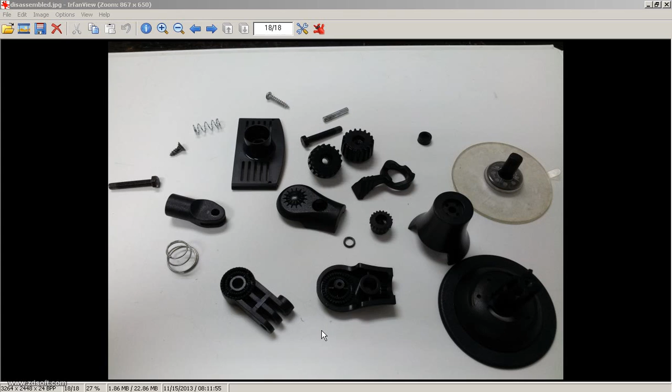Alhamdulillah, for this video session I would like to continue our video tutorials on our glass suction cup mount holder. For this video session, what I'm going to show you is how I made this component, which is the middle slot gear connector. This middle slot will be connected to this middle gear connector here, so that it has some attachment to this slot.

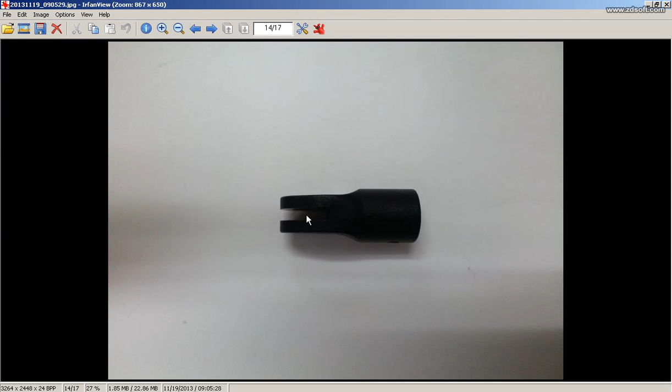So if you look directly on this image, this middle slot has a slot here, so it will be attached to the middle gear connector, two slots here. So we have two slots here. This middle slot will be fit into this middle gear connector, two slots here.

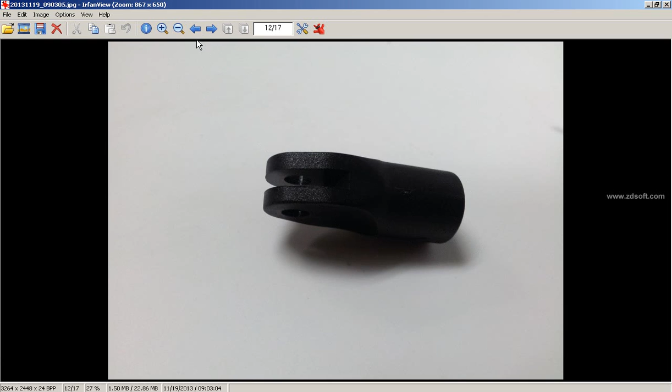So basically, I already know the dimension for this middle slot. Okay, so this is a closer view. The diameter is known, and the total length of this whole thing is known. So let me show you another view. This is a front view, this one is a top view.

So we have a slot, and if we look closely, we have a kind of curvature, a straight line here, and a curve here. So as long as we know the dimension, we can make a cutout from here. We have a line and a curve here.

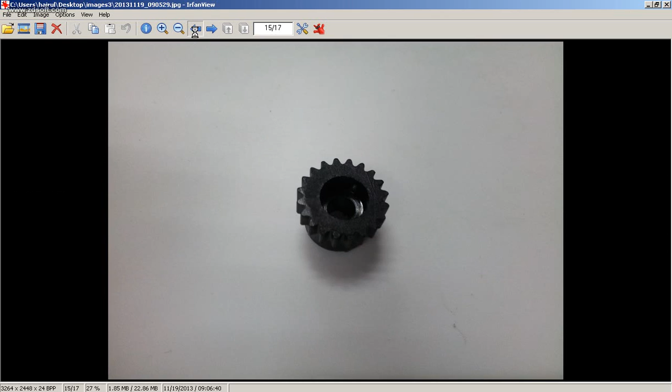Then after we have a revolve of the smaller cylinder and bigger cylinder here, we can make a cutout of the curvature that is known here, until we finish our final shape. So let me show you how I do it in SolidWorks for this kind of component.

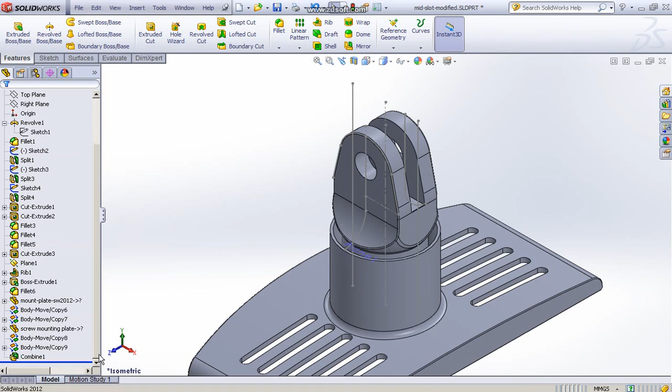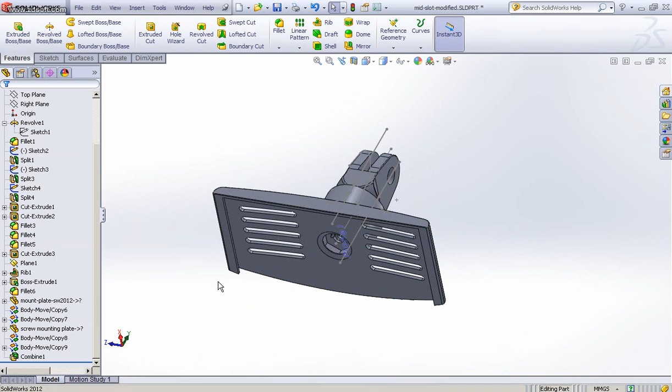So let me show you the finished part. Okay, if you look at this middle slot here, I use the combination of the mounting plate here to get the position of the screw to be cut out at the end, which I will show you at the final step.

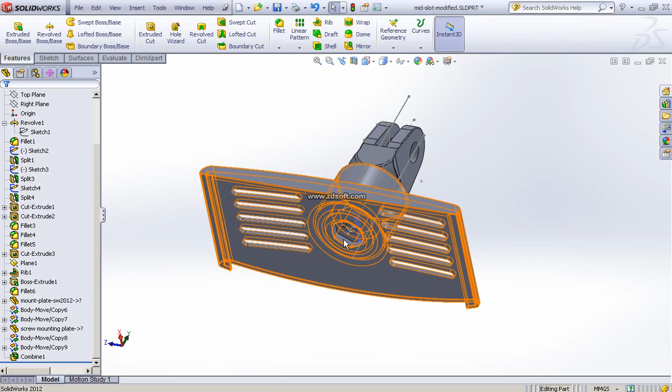Later on in this video I will show you how this mounting plate is not meant for this single component file. The mount plate is meant to attach here, so for us to position the screw, where the screw will fit into this bore of the mount plate. So I need the right position of the screw, so we could make the cutout in a thread for the middle slot.

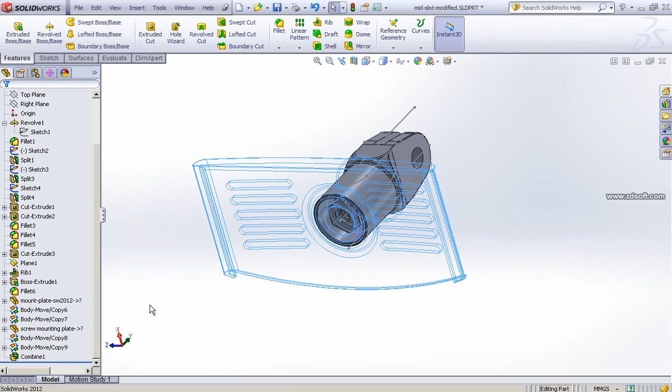If I turn off this mount plate, our end result will be like this. So we have a middle slot, and at the end we have the inner thread here at the bottom. So let's look at the beginning of this file.

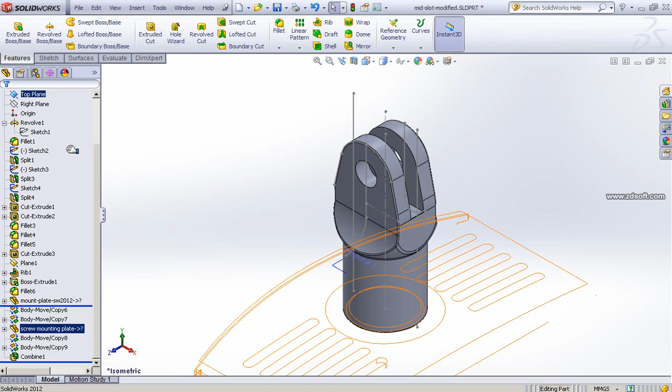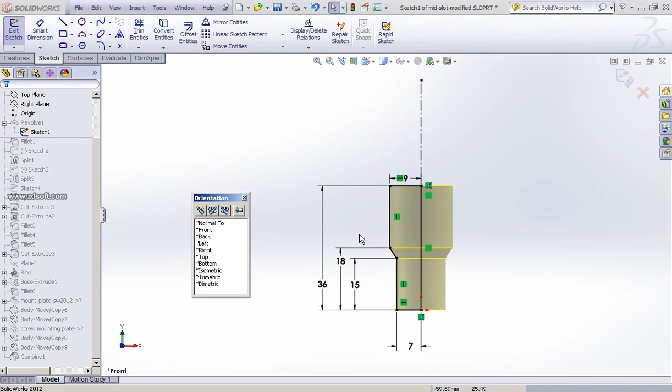So firstly, for this kind of component, what I've done is make a revolve of two cylinders. We have a smaller cylinder and a bigger cylinder. This revolve is based on the sketch here. If I zoom to normal view, as long as you know the cross section of the rough cylinder, we know the smaller cylinder, and this portion of the bigger cylinder which had been cut out by the curvature that we cut out here. So we know the bigger diameter and the smaller cylinder.

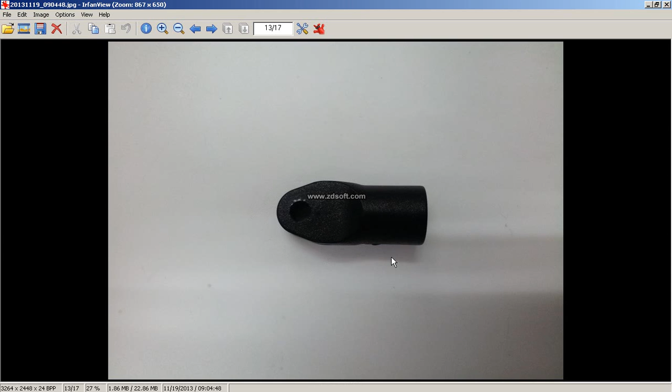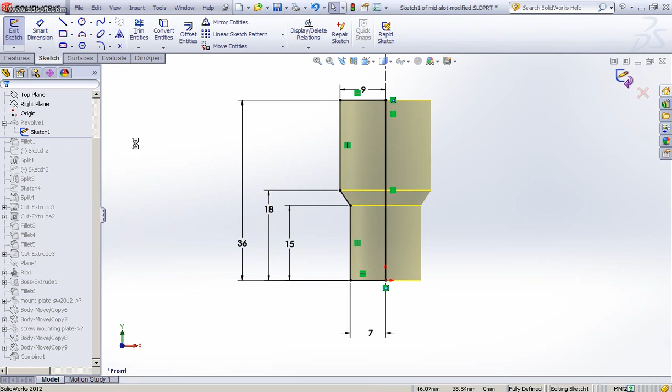The smaller cylinder I already measured, and the length, and we have a bigger cylinder. The total length of this middle slot is 36 millimeter. So after I make the revolve, the next thing is to do some fillet at these edges to make more curvature, since we have a curvature shape here. Okay, after the fillet, what I do is some sketching.

If you look on the sketch plane, I got some sketching here, where with this sketching I use the split command in SolidWorks to make a cutout. This section can be shown in this image. If you look,

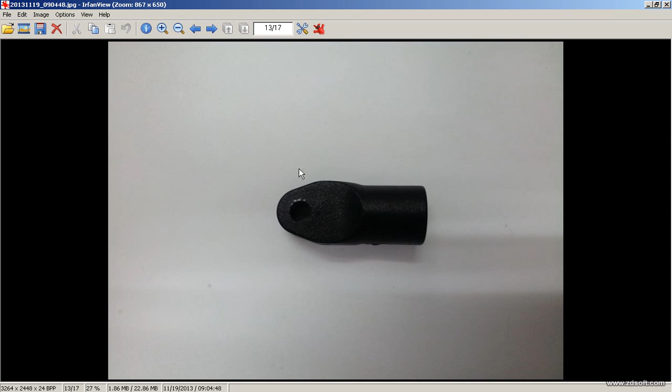if you look on this image, if we zoom it closer, actually we have a straight section here. It's a straight cut here. A straight cut. So I already measured the distance from this horizontal line to the center here. So we have a straight cut at these edges, both two edges, a straight cut here.

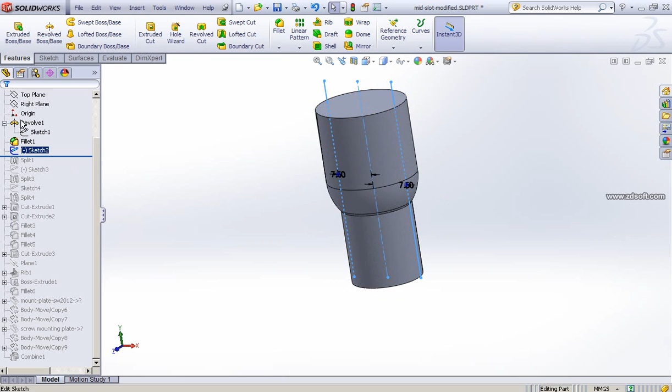So the sketch is shown here, as shown in this file. So I made it on the front plane. Okay, the sketch is on the front plane. So if you look on the sketch, we go edit sketch, and I go to normal view. So the sketch from the center line is 7.5. Okay, I make just a single line here, mirror it. Distance is 7.5 to the right and to the left.

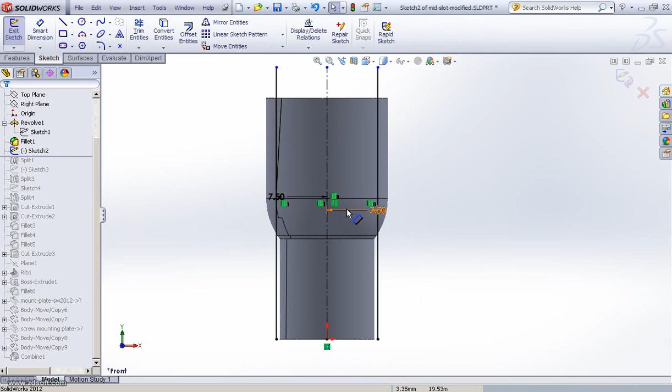So then after I got this line for the sketch, what I do is I do split, as I have shown you in my previous video. As long as you have a line here, you can use split from Insert, Features, then Split. Okay, the setting of the split can be shown here. So once you do split, these two lines will be your sketch. Make sure you select the sketch, or make sure that your sketch is active.

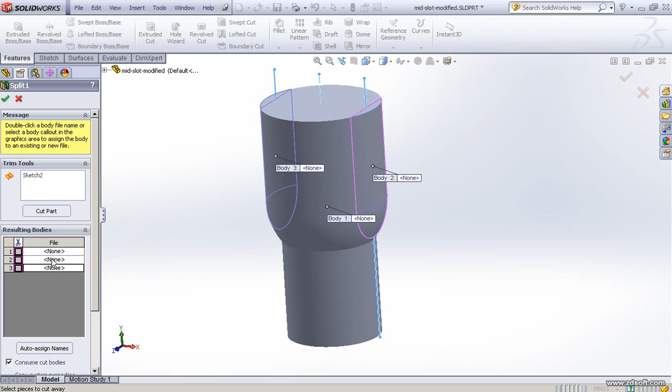Make sure in this parameter, your trim tool is your sketch, then if you press cut part, it will cut. At the beginning, if I uncheck here, nothing is selected, but it knows the sketch tool. This sketch will be used as a cutting tool when you press cut part. So automatically SolidWorks will put up 3 parts of this body that could be cut out. What we need is this portion to be cut and this portion to be cut. Number 1 is the main portion, this is not going to be cut, so we uncheck this. Okay, so make sure that consume cut bodies is checked, then you can do split.

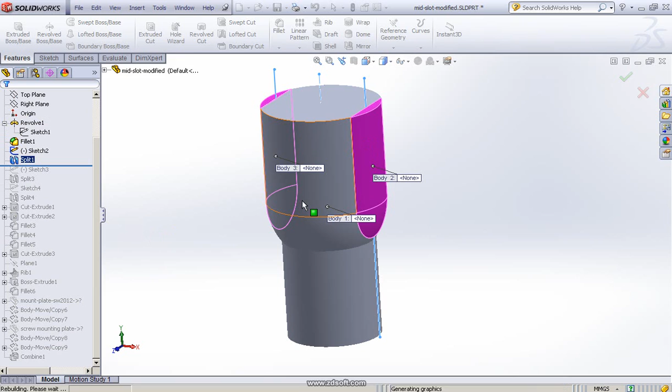Okay, split is basically like a cut extrude, but if you want to use cut extrude, you should have a closed shape. But with split, as long as you know the cutting line or cutting plane, you can use split. So this is that portion there. Okay, so in this step we make a straight cutout at these edges of this component.

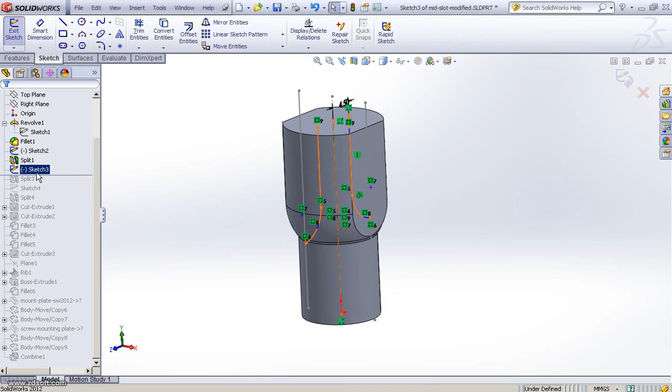So the next one will be sketch 3. For sketch 3, if you look on the right plane, in normal view of this sketch, I have another slot here, another curve here to make a cutout, which I will do with split also. This curvature can be shown if you look on the other image. If I zoom it closer, on the other side, on the right plane, I already know the curvature here, and we have a straight cut here until we have a curvature here on the right plane, so that we could cut out from this component.

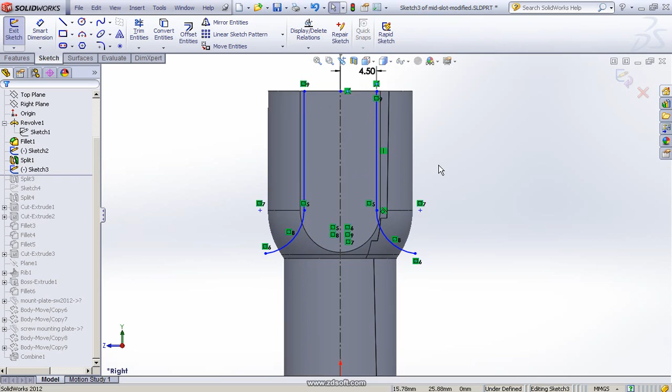Okay, so I make a sketch here. The distance between this line and the center line is 4.5. Since this portion will be cut out, the total width left here is 9. Okay, 4.5. So make a rough sketch until this point, which is coincident with this line, and roughly until it has some curvature. Okay, the important distance is this 4.5. This is the main one that we should put, because since the thickness is 9, this portion will fit into the middle gear connector.

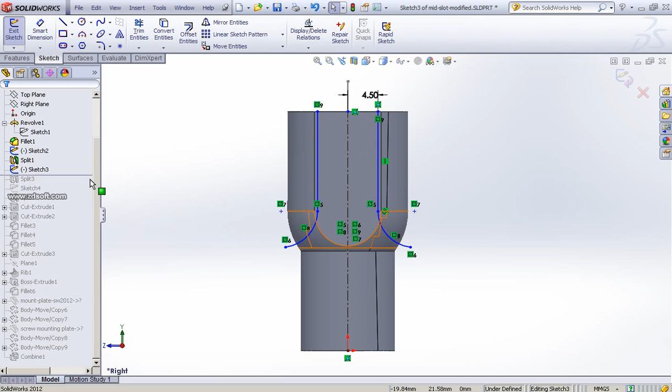So after I do the sketch here and mirror it to the left, I use the same approach. We make a cutout using split. Okay, make the cutout using split. So we split the object.

Okay, the split setting. The sketch 3, which is the two sketches now. So make sure the sketch 3 is selected, then you cut part, so you have options. If I check 2, it means the middle body also will be cut out, but you need this body, so make sure that you uncheck it. You only check which portion we want to cut. So when I do split, you must also make sure that consume cut bodies is checked.

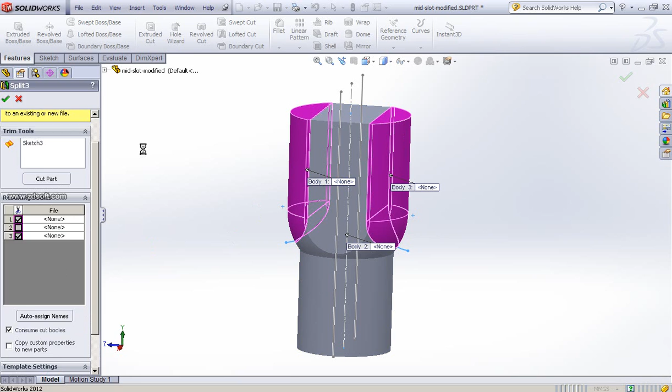Okay, so this is the result of our second cutout. So the first cutout we have on the front side, we have a straight cut. On the right plane we have a straight and curvature cut. So we could form this kind of geometry.

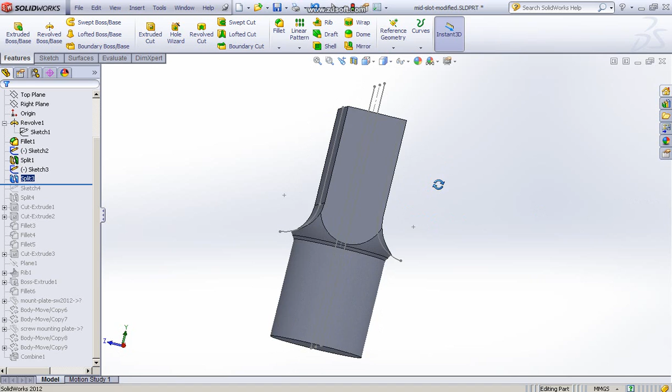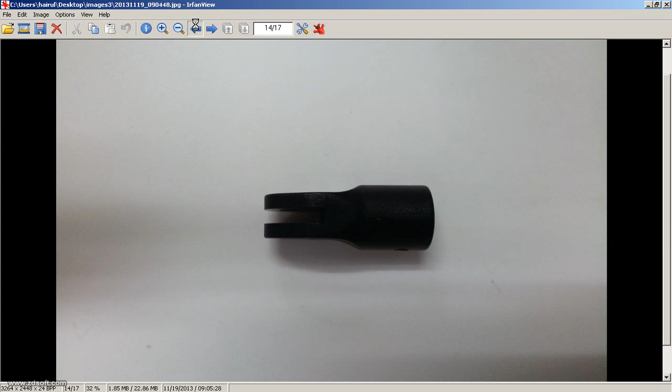Okay, the next thing, if you look at this image, back in the front view, we have another part here that we should do, a curvature here, which is a cylinder. We have a circle here, and we have a wall here. So we need to position a sketch here in the right position, so at the end we have a bigger circle and smaller circles, and we can make a cut extrude.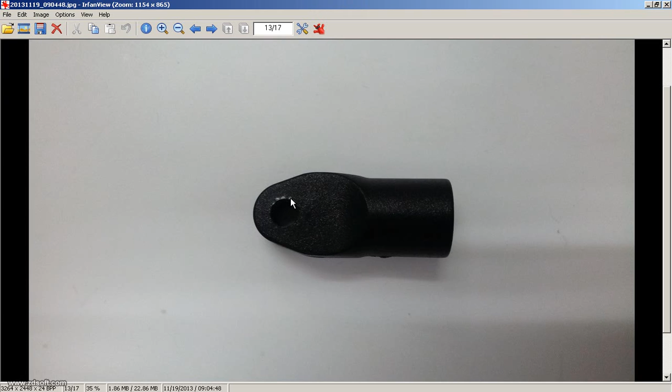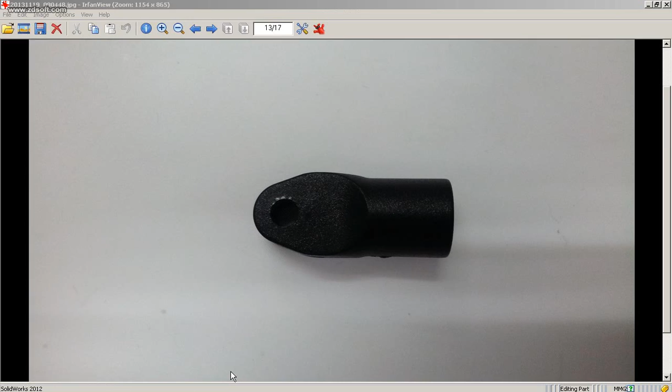So I already measured the dimension of this shape. The next thing is it should be on this plane, either this plane or this plane. So we make a sketch on that plane. The next step is that I make a sketch on this plane. If you look on this plane, I have a sketch there.

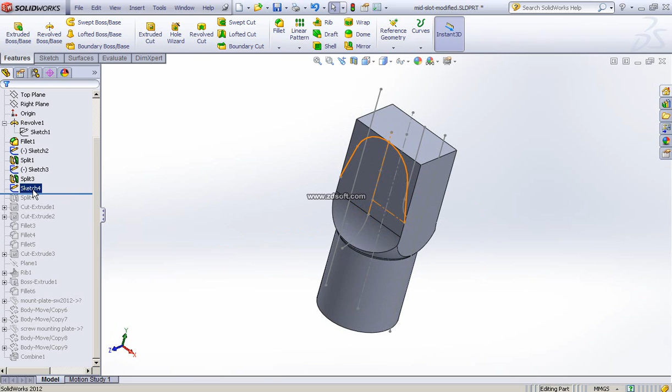Then if you look at the normal view of the sketch, we have a bigger diameter here, and we have a line there. So then we use the same approach. If I make a closed shape, I could make a cut extrude, but in this case we have another option, as I've shown you previously, to use split. So I made a line here.

This portion has actually been trimmed out. It's a closed circle that has been trimmed, and this line connected to the semicircle is tangent. Make sure the line is tangent, and also since the circle diameter is 12 here, the distance from here is 12. I think it shouldn't be a problem for you guys to do this kind of shape. Make sure that you set a relation. We have tangent here.

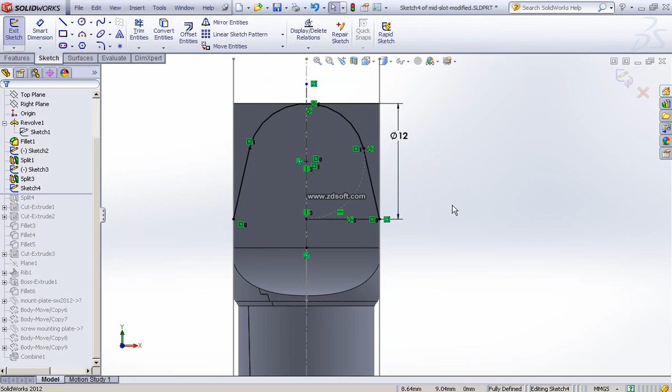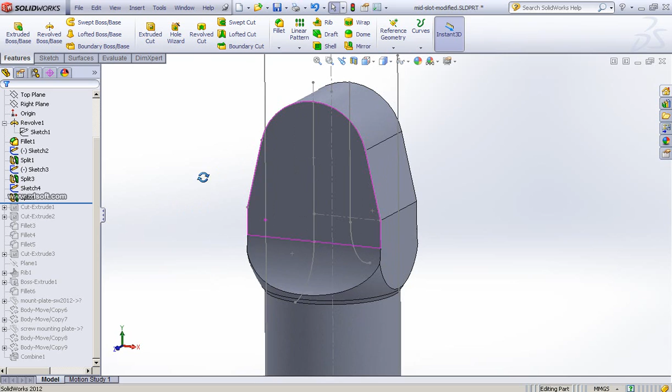Okay, then after we have drawn this shape, we use the same approach. We use split. Then we have this geometry. The top has been cut out by the shape. So if you look at the settings of the split, show the sketch. The sketch is selected and we cut it.

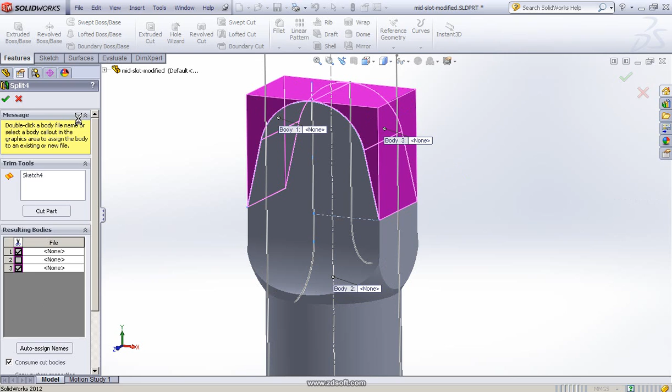If I check, make sure the middle body is not selected. So uncheck 2. This portion you want to be cut out, the left and the right. Make sure that consume body is also checked. Then we use split. After I've done split, the next move is to use cut extrude.

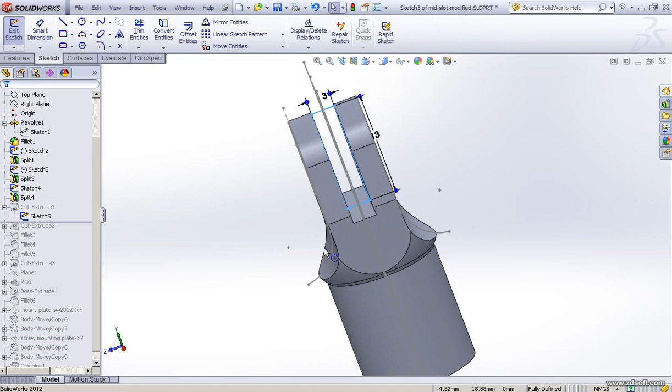Since we have holes here, the cut is not the hole. I do the slot, the middle slot. Before cut extrude one, this is solid. So the next one is the slot. For the slot, as long as you know the dimension of the rectangle, I use cut extrude. The rectangular shape has 13 and 3 for the width, so it will cut out

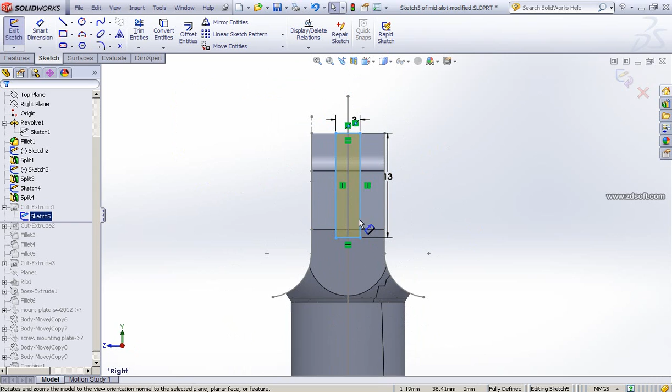a middle slot here. So in this approach, I didn't use the split. I use extrude cut. So I draw in the right position. At the beginning, you just draw a rectangle and put the dimension 3 and dimension 13. Then you select this line, make sure to select the midpoint, the middle point here and this end point here, and set it to coincident.

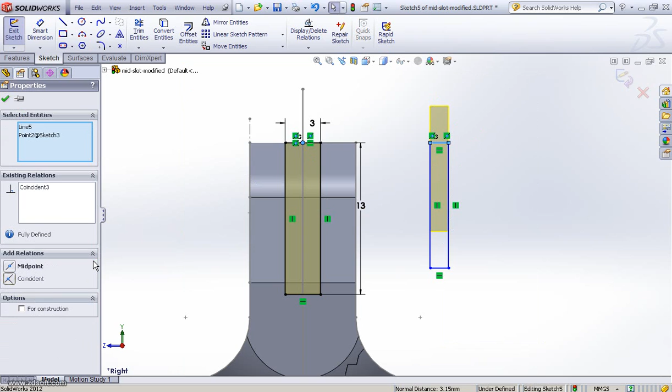So just make sure you select this line. This is an example. I select this line, middle point. So then you select the middle point, and you hold on. You set the relation to be coincident, so the rectangle will be moved to the right position. Okay, so this is an example.

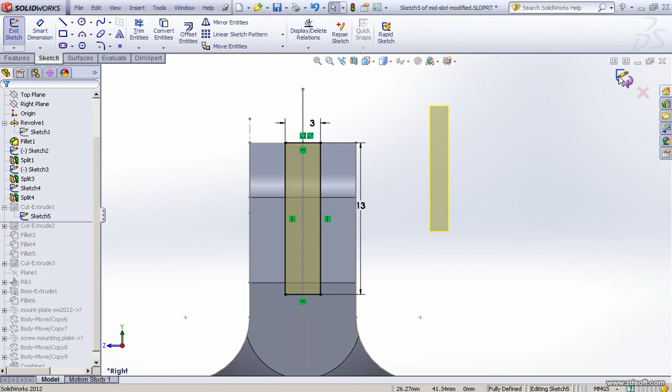So let me delete this part. Okay, right. So we don't need so. Very good. So we didn't have the slot. Okay, so we have the middle slot here.

Okay, the next thing is a cut extrude. Then to make this bore, okay, we have a cut through hole. Okay, for this cut through, as long as you know the diameter of the hole, in the right position at the center of this, the sketch plane should be on this plane. It's cut through.

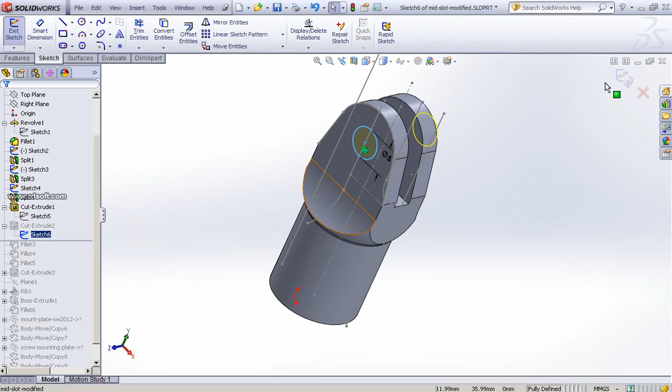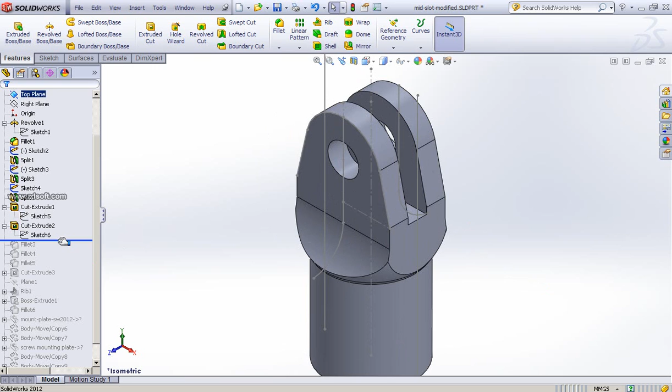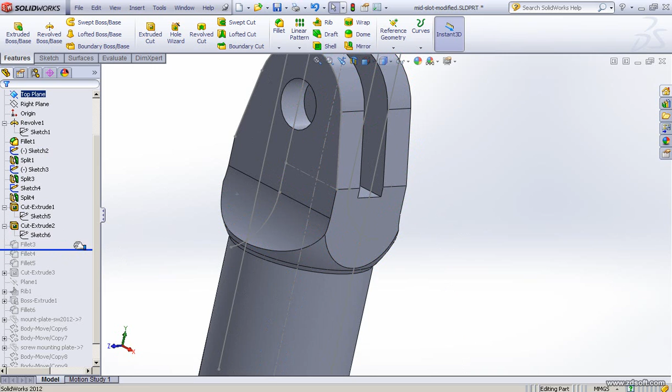Okay, what's next? The next thing is we do a little bit of detailing. We have fillet, so the first fillet will be, if I go to the next step, the first fillet is at this part, okay, at these edges. I do some fillet with a certain radius, okay. The radius of this fillet is about, okay, before fillet, this edge is not filleted, both these two edges, and on the other side we have fillet. We have fillet here and we have fillet on the other side.

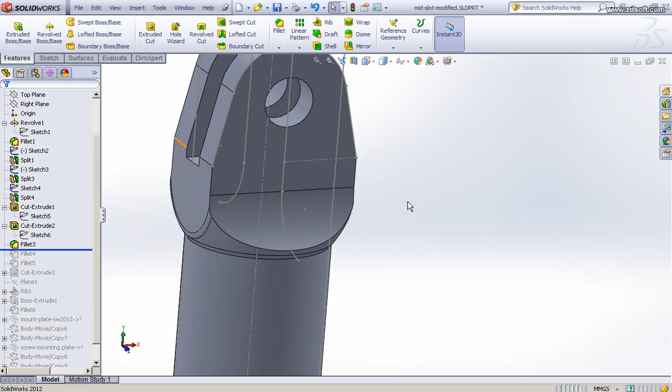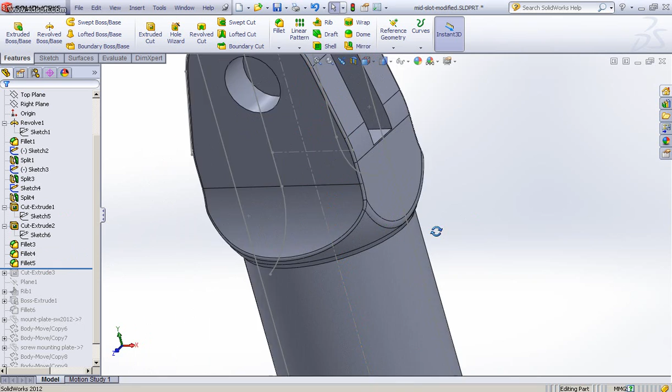Then the next fillet will be this part and this part, okay, the edges there. Before, we have sharp edges, we have a sharp corner here, then we have fillet. So the next thing to do is another fillet at these edges, and these edges. In this case, I use FilletXpert, with the radius of the fillet 0.2.

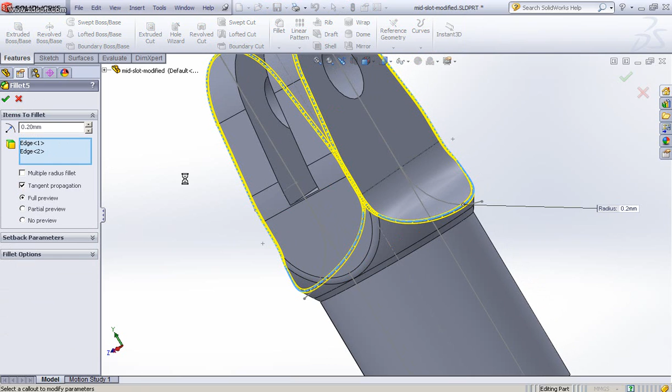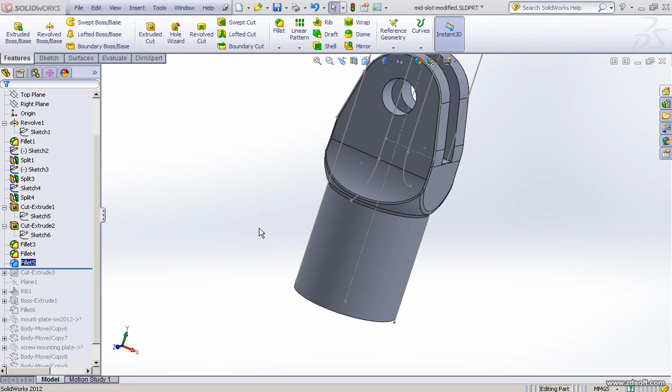Alright, after I've done some fillet, the next move will be to do some cut extrude at this bottom surface. Okay, I did some cut extrude. If you look in this sketch, we have a diameter 12 here. Okay, we have diameter 12 cut extrude and reverse, with the depth of 12 millimeter. Okay.

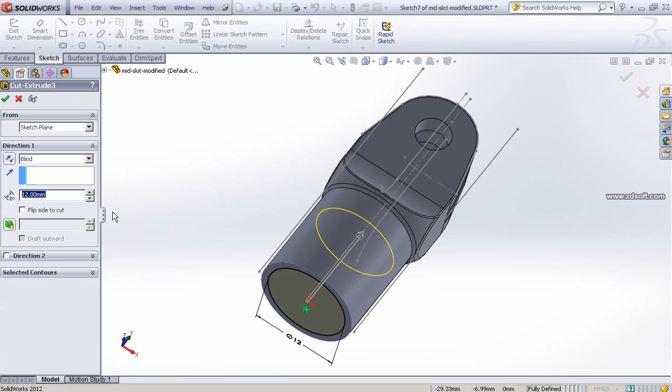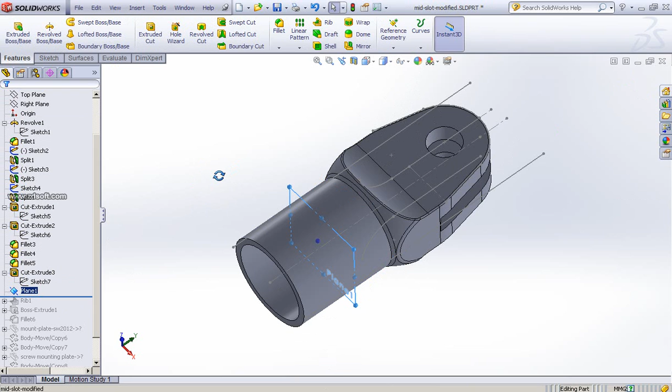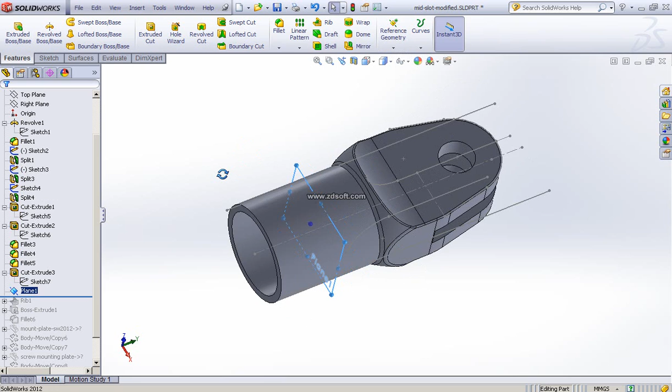Then I make a plane. Okay, this plane here. Actually, this plane can be done by using reference geometry plane. I'm selecting the cut extrude plane here as my reference, and my second reference is a certain distance at certain edges to make the plane in the right position. So at this plane I do some rib, because it's gonna be the internal structure of it. There will be a rib inside.

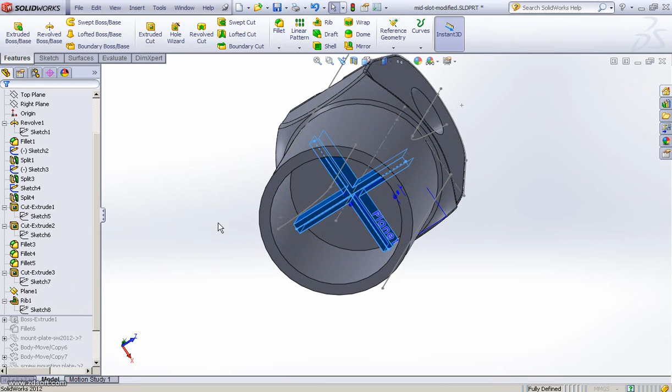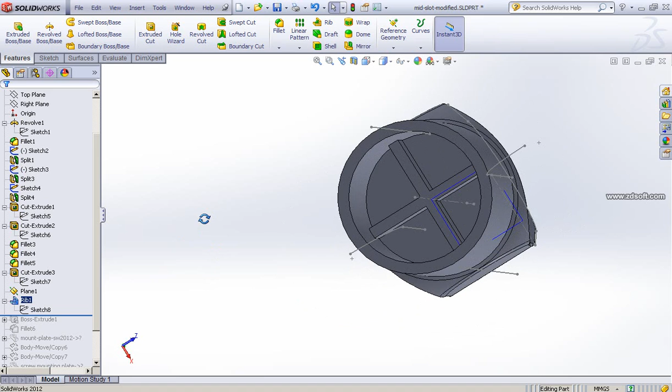Inside this bore, we have a rib. Okay, we have a rib with our sketch plane, a single line. Make sure that when we do some rib, the material of the rib should be facing upward, and the thickness of the rib is 1 millimeter. So we have some internal rib inside. Okay, the reason this component has a rib inside is to strengthen the internal structure here.

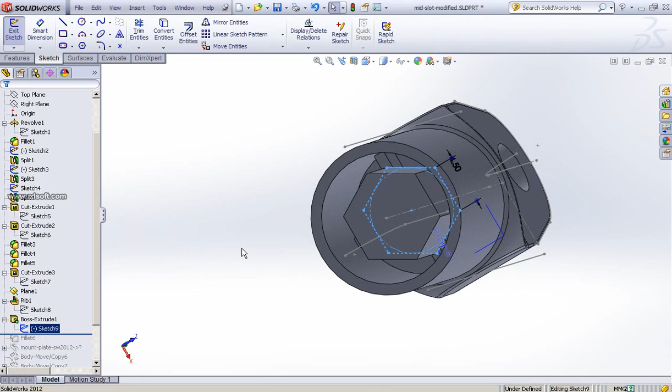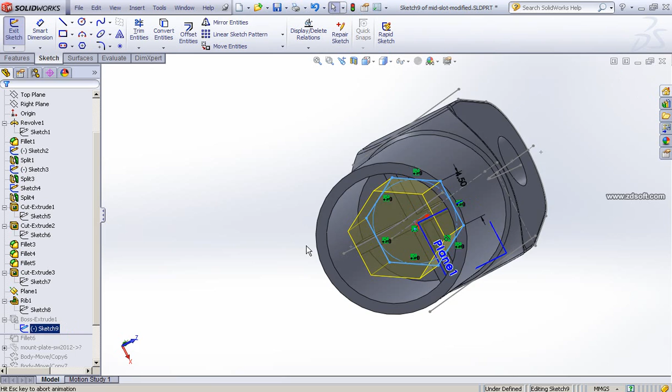So after rib, we have another boss extrude. We have a hexagon shape. So the hexagon plate will be directly on the top surface of the rib, that will be the plane. Okay. So if you look at the normal view, we have a hexagon here in this orientation. The distance of the edge is 4.5.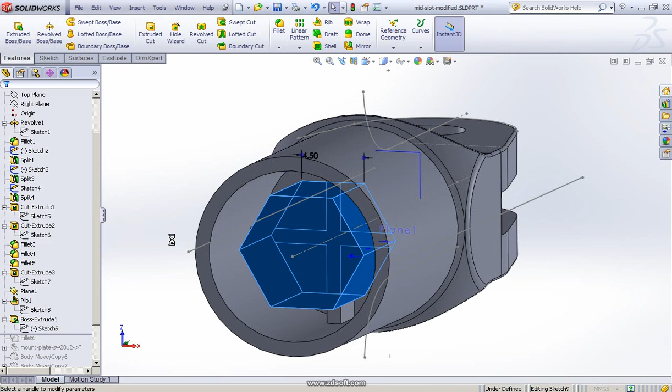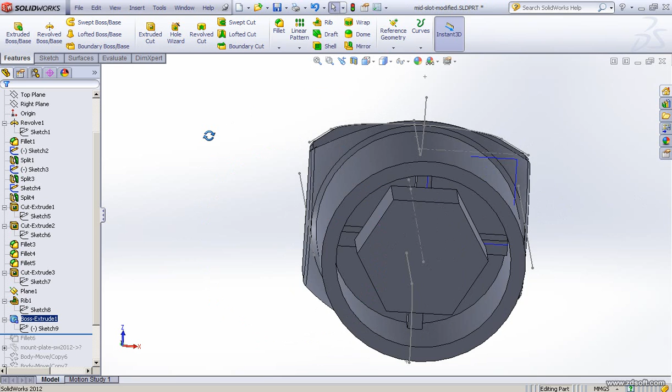So then the boss extrude, the distance of the extrude is 4.5 millimeter, in this direction. So we have an internal hexagon inside. The reason to have the internal hexagon here is for us to mount. Not a pin, the screw will be attached at the center. We have a screw. Later I will show you how we fit the screw at the right position here, so it would subtract to form an internal thread.

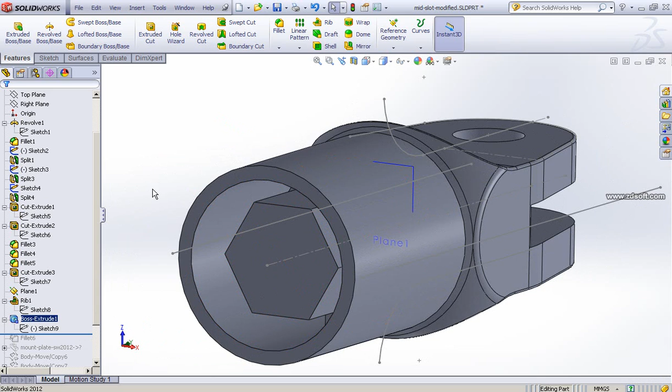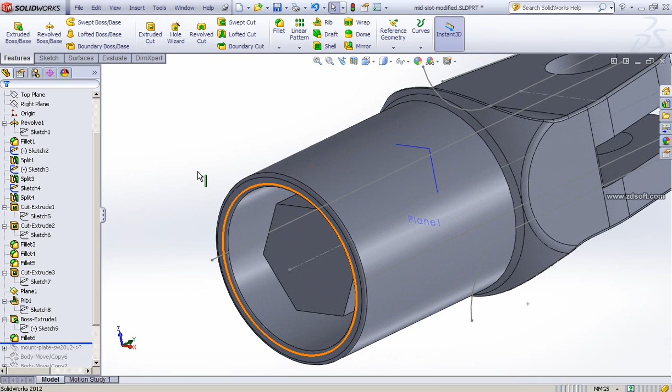So after we have the internal hexagon object here, the next thing is I do some fillet to finish this component, the casing. We have fillet at these edges. Before fillet we have sharp edges, then after fillet, okay, with a certain radius. Alright, let me zoom out a little bit. Okay, this is the first part of this component.